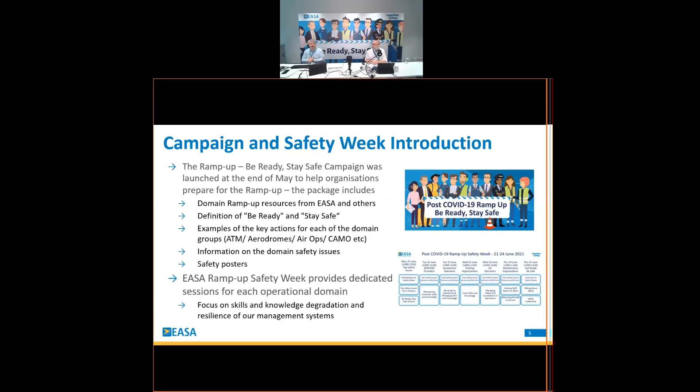Good morning, everybody. I must say that I'm honored to be the moderator for the maintenance session of the post-COVID-19 ramp-up safety week. Be ready and stay safe, this is the motto of this week. I promise a very, very interesting session that will make even our colleagues from the other sessions a little bit jealous.

So in the context of the post-COVID-19 ramp-up, EASA published an updated review of safety issues, version 2, to support the industry in the preparations for an increase in flying activity over the coming months. Organizations should then evaluate those safety issues and, where applicable, capture them in their respective management systems. The document is accessible under the link that is visible in the slide.

Particularly relevant for our maintenance activities, I would like to refer, for example, the effect of biocides on aircraft systems and structural components, skills and knowledge degradation due to the lack of recent practice, which have already been mentioned as one transversal issue. Risk assessment based on previous normal operations no longer valid, and the scale of aircraft storage and subsequent de-storage may lead to technical failures when the aircraft are returned to service.

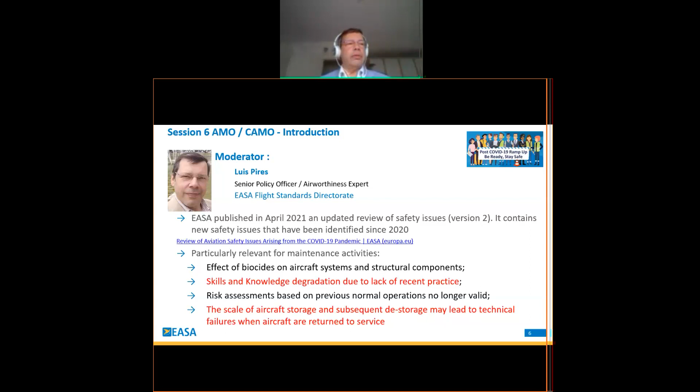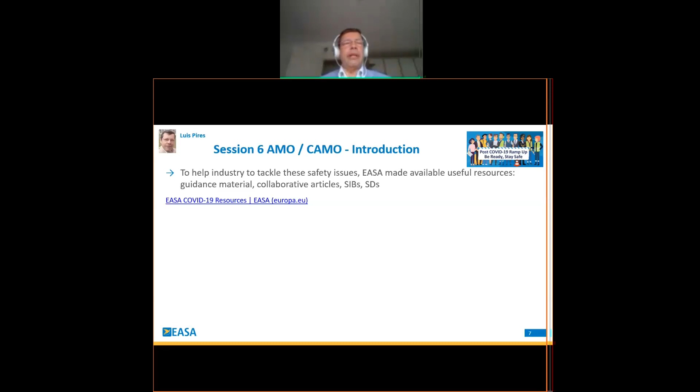So, to help industry tackle these safety issues, EASA made available a set of useful resources, from guidance material to collaborative articles, to SIBs, safety information bulletins, to safety directives. And you can find all those resources under the link that is posted in the slide.

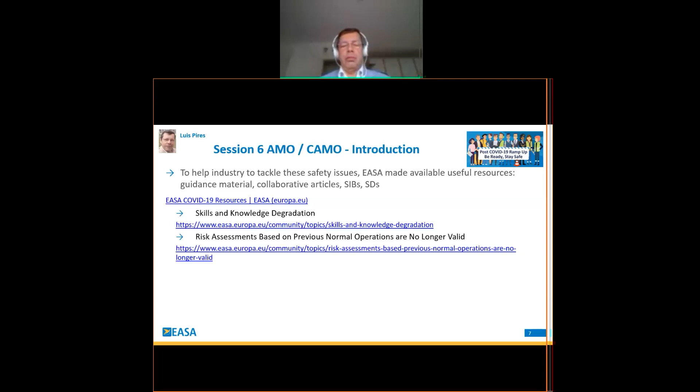You have specific collaborative articles about skills and knowledge degradation and about risk assessments based on previous normal operations that are no longer valid. You have guidelines about the storage of aircraft and return to service of aircraft after storage, which is a really nice one, it gives a lot of information. And I'd like to draw attention also to the SIB 2020-14 with regards to covering the pitot static issues after storage of aircraft due to the COVID-19 pandemic.

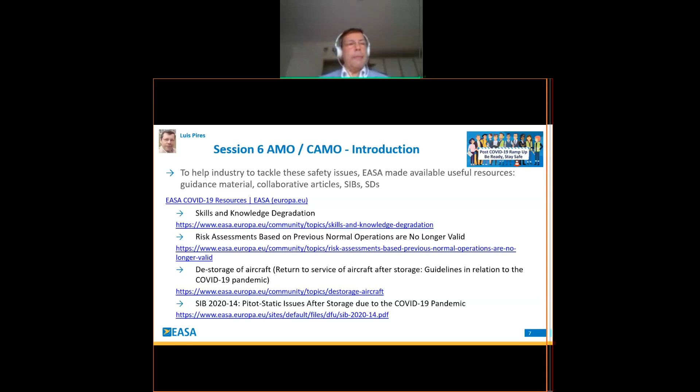So this session will specifically focus, as already mentioned, on those two items: skills and knowledge degradation in the operational workforce, and bringing aircraft back from storage during the ramp up.

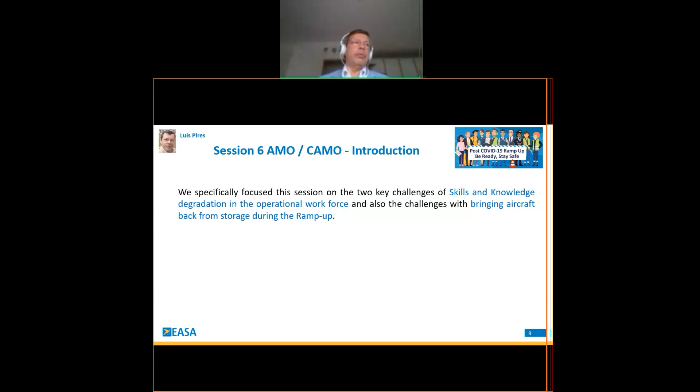We will consider some practical challenges that aircraft maintenance organizations and continuing airworthiness management organizations are facing at this stage of the crisis, particularly with regards to those two items, and what this means in terms of specific practical problems. What specific experience does each operator have? How have they talked about this challenge with their staff, and what action solutions have been implemented?

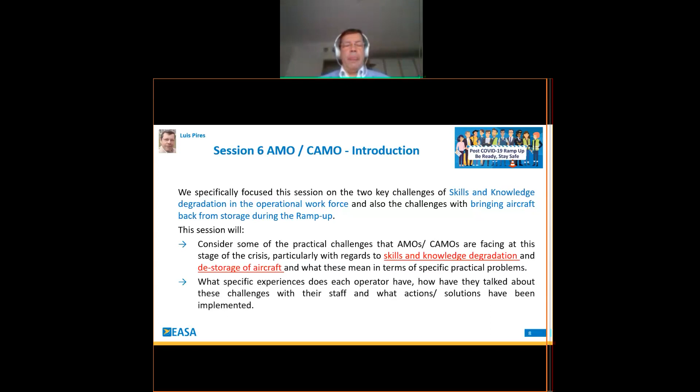Without further delay, it's my pleasure to introduce the panel members for this session. A very interesting composition. I start with David Wind from German Airways, Director of Technical Operations. We have Svein Albertusson from Icelandair, Manager Technical Support. We have Melly Demir from Airbus, Parking and Storage Multifunctional Team Leader. And last but not least, Raj Jagbunda from KLM, Director of Line Maintenance International. So I hope you enjoy this session.

So back to you, John, for the presentation from David. I will stop sharing my screen now.

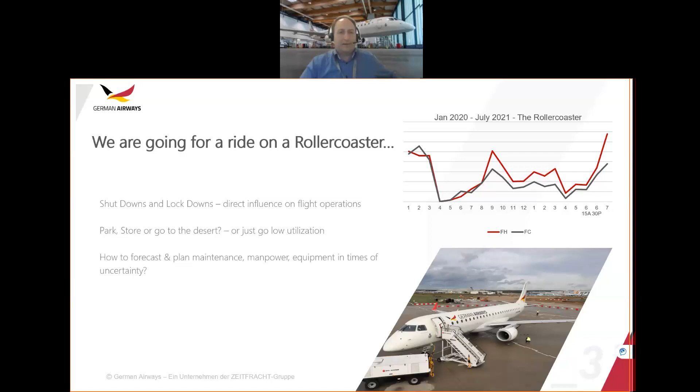Okay, a little bit about the challenges that we faced. Again, being a CAMO and a maintenance organization, there were two different sides.

The first thing that started opening up only months into it was the widening gaps in maintenance. The clock keeps ticking, the flight hours and flight cycles are not being accrued the way they were normally planned for, and this meant we had to do scenario planning.

CAMO was very busy at first, coming up with planning the events. The production planning in the AMO was equally as challenging. For every scenario we had to come up with a realization plan, and it wasn't just one, two, or three, and it hasn't stopped. It continues today because it looks like we're coming out of COVID, but

we have no idea what Delta is going to do to us. So we're still considering and still looking at the scenario plans.

For us, it was also a very important part of this to keep the team. We're a smaller organization, I have 27 people in my AMO and CAMO together. We're more of a family in some ways, and the focus is we have to keep the team healthy. We have to keep them proficient, employed, and ready for the restart.

And that gave us, when we looked into it and started reflecting back, we actually had management of change, which is well established in our safety management operations and department in the organization. The management of change, we also realized, has an awful lot of human factor related items, which also

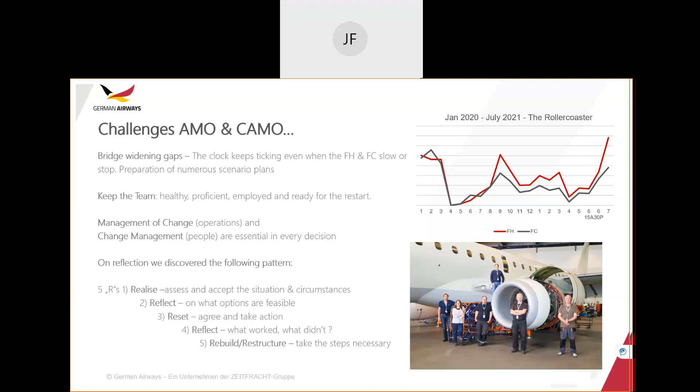And then we came to a reset, because we knew we had to start adjusting and changing things. The key word on this one is agree and take action. Agree in the sense that there might be agreements we need to make on a commercial front, there might be agreements we need to make with the unions, there might be agreements we need to take with the competent authorities. All of these things have to be understood, agreed, and then enacted.

And then we very quickly go into a point of reflection, because some things worked, some things didn't work as we intended. The market was very dynamic and changing, and that puts us back into a correction opportunity.

And then looking to rebuild and restructure, because coming out of this we realize we're going to be a different operation. Our market will likely be different. And not just rebuilding—it may be restructuring actions required in our overall group to be ready to not just restart, but restart into the new world.

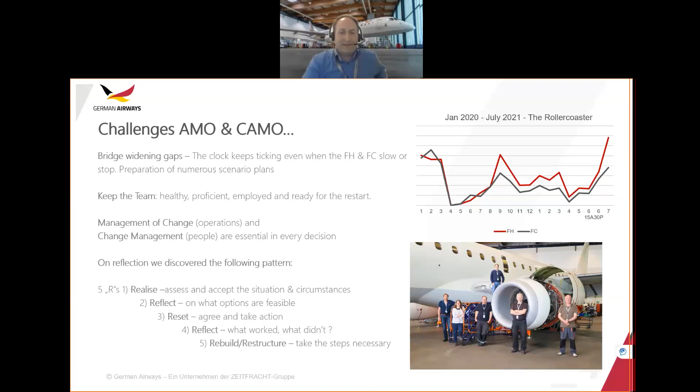Okay, next slide. So, actions taken.

We had a unique COVID risk. I think all of us in the operating environment had a unique COVID risk because working from home is sometimes limited, particularly in the AMO. Some of the CAMO staff can work from home, but it's pretty tough to keep an aircraft operating and having your engineers at home. So there is an awful lot of increased manpower planning to minimize the exposure to risk

that is continuing to go on today, even down to the manner and amount that we test internally to try to prevent any breakouts or events inside our organization, which could have an impact on our manpower and resources to fulfill our operations.

Again, at the same time, we had to look at scalability, because that roller coaster wave meant we had to scale up and scale down in certain areas, whether that be spares, components, human resources, but also be ready for a quick restart.

Again, that then starts introducing other challenges when you are putting staff on furlough. How long are they on furlough?

How do we deal with skill loss and shift? A number of things we started doing was staff rotation between our line and base activities. I put an increased focus on task training, essentially using our existing CAT-A staff task training program and reintroducing it as a form of recurrent training. Mentorship and the buddy system, however, were the most effective, where we were teaming up individuals to ensure that competency was in place.

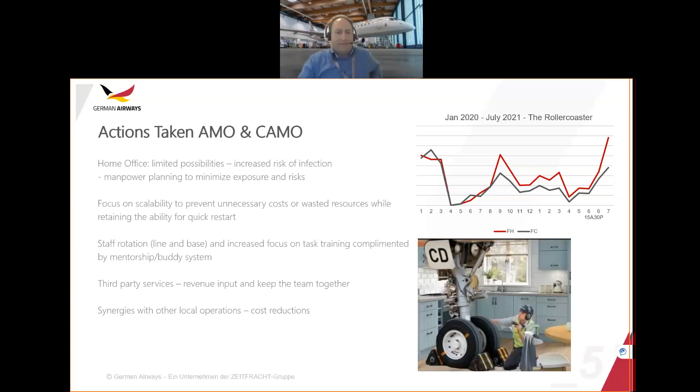So now coming back out and ramping up, there's a number of things that have been challenges for us. Standard consumables - we noted this as early as half a year ago, that things that used to be off-the-shelf products from a variety of vetted vendors may have long lead times. We were quite surprised the first time a standard grease was available in 18 weeks.

So these become challenges to ensure we have all the required and OEM specified consumables in place. Previous supply data - again, because some manufacturers had ramped down production of things, where you had always gotten things inside of a week may not be the case anymore. Brexit hit us right at the beginning of the year as well. Previously we had a very reliable, dependable UK group of suppliers, and suddenly the import costs, the transportation times, the overheads made it a challenge to continue to use them.

And now, towards the ramp up and as we're adding line operations, the staged call-up and recalibration of tools and equipment - these have been processed. We tackled these early, but it's something that often gets overlooked on the ramp up, that things we didn't require would be put into quarantine. But now as we ramp up, we have to make sure we get them all calibrated and back ready for service, and there may not be the capacity on the market to handle things as fast as you'd like.

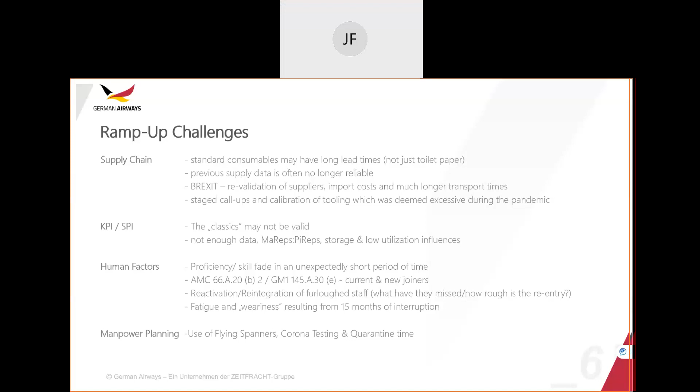Reactivation and reintegration of furloughed staff. There's two scenarios there. It's one thing, what have they missed? But also, quite often the furloughed staff that are being called back in may not be generally the B1s and B2s were kept working in the AMO, but the Cat A's were furloughed. That gives us more flexibility in the operation, but now those that have a lower wage rate are the ones

that have had to stay home, had the furlough impacts, and the reintegration into the workplace. The A's and B's have done all the work and have had to work double duty, and the Cat A's come back in, and there can be a little bit of a rough entry there because we have to deal with some human factors there as well. Perceptions of what is fair and what is not fair can play a part of this. And then tagging it into the other, I think everybody understands the fatigue and weariness that have resulted from going through the pandemic.

Manpower planning, something we had to add also into, and we're reflecting it as well as today. Something we did not at the onset realize was going to be as big was the use of flying spanners, because technical support at certain outstations wasn't available. Corona testing requirements for our staff, and the quarantine time returning from travel or flying spanner work. Actually, for us, it hit 12% I was losing in quarantine time at one point in time due to my flying spanners of resource. So that needs to go back into the resource manpower planning.

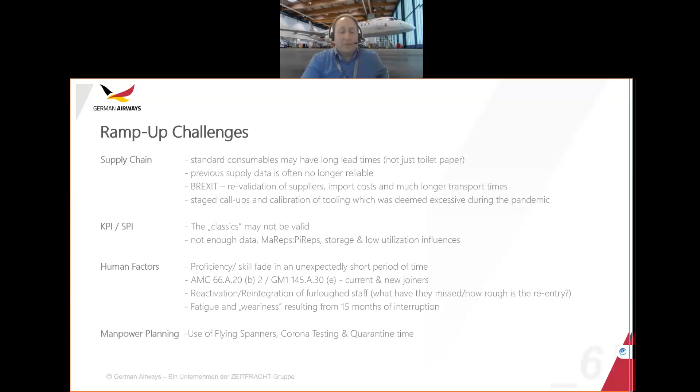Okay, tools available, management of change and change management. All of these different little things that we've seen in our small operation. We looked at what criteria can we use, what tools can we use to help us ask the right questions, to challenge our decisions, to establish barriers and mitigations. And we came back up that we were always using certain portions of the dirty dozen. Very classic, but applying the questions that we see in the dirty dozen and the warnings has helped us make our decisions and really challenge our thought process when we're analyzing what could happen as we make adjustments in our organization.

Following on to that, I guess if there was a mission statement now as a closing statement to my presentation, it's a shame to take a problem and not turn it into an opportunity. And I think what we see coming out of COVID is it's an opportunity to introduce and improve processes, training, efficiencies, and safety promotion inside the AMO and inside of our maintenance organization and our CAMO. It'd be a shame if we come out of this and we haven't had the opportunity to improve.

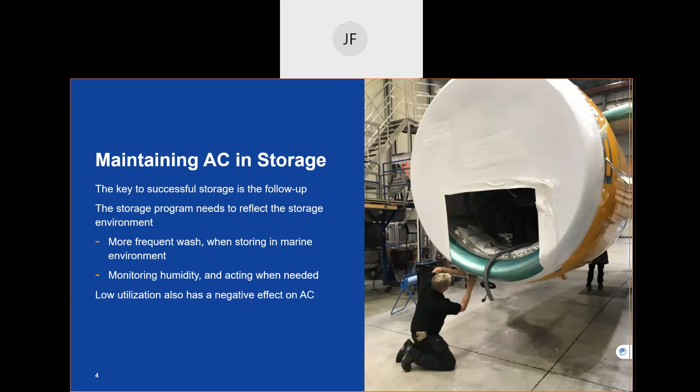We also had a few aircraft in low utilization. Every now and then we saw a degradation in the condition, and we tried to act as much as possible. But we always experienced the roller coaster ride, like David mentioned, so we are familiar with those challenges. Next slide.

So when we obviously realized that COVID wasn't going anywhere anytime soon, and the summer was about to end, we decided to relocate the aircraft that had been stored in Keflavik. We realized that the environmental conditions had a great effect on the condition of the aircraft. So we started to look southbound and relocate the aircraft to Roswell and Lleida in Spain. That actually gave us some experience in ramping up or returning the aircraft to serviceable and airworthy condition.

Of course, we were not familiar with all of the consumable materials and so on required, as mentioned in the maintenance manual for storage. So that gave us good experience in getting the aircraft ready. But we also realized that storing the aircraft abroad in different locations meant more complex oversight and more planning. So that was a challenge we needed to tackle. We also had aircraft here in Keflavik in both active and long-term storage, so those are definitely challenges. Next slide.

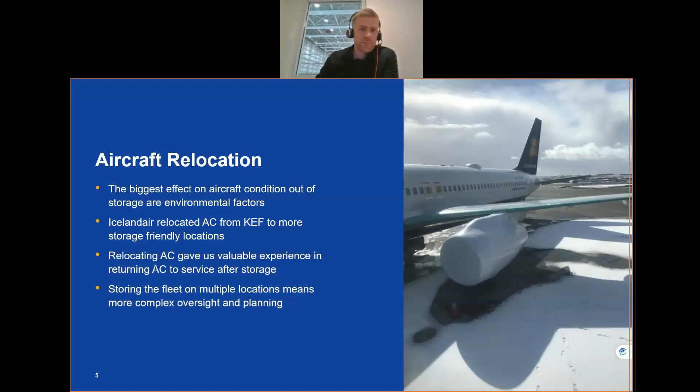Talking about the Icelandic team, the employees, this was definitely a difficult year, probably one of the most difficult years we had. Of course, we experienced layoffs and financial difficulties and COVID restrictions like everyone, and it definitely had a great impact on the mental status of the team.

We saw clear signs of fatigue and strain in the employee team, and basically I would say some people have been flying on reserve fuel for the last month. So that's definitely a concern going into the ramp up that we really had to discuss.

But we also realized that having a plan and sharing as much information as available is very helpful for the employees. And if you don't know what's coming up, you have to tell people that you don't actually know that. I believe that helps.

It was a concern that there was degradation in training, but we always were operating the aircraft, always operating the 757 and 767. Of course, we need to retrain people for the 737 MAX after the prolonged grounding we experienced, but that's been a factor as well. So, next slide.

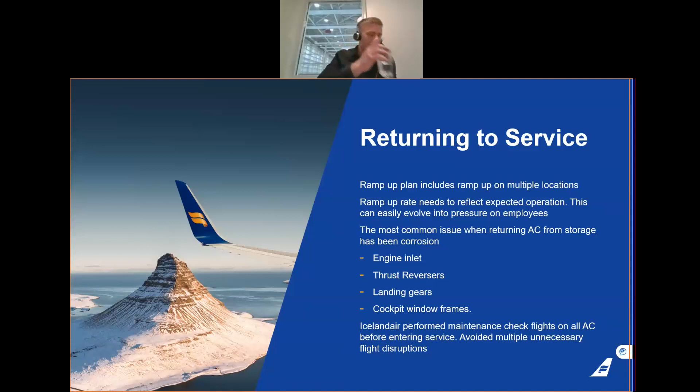Talking about return to service, we had, as mentioned before, a ramp-up plan that included ramp-ups at multiple locations. That was not necessarily bad. We had multiple teams working on the aircraft, which made it so we could ramp up faster with multiple locations and multiple teams.

But that demanded a good plan, we needed to have good conversations with all the employees and third-party MROs. And a speedy ramp-up can definitely turn into pressure on the employees, pressure on both maintenance and CAMO personnel. So that's definitely a risk factor.

Talking about physical conditions and findings out of storage, probably the most common factor is corrosion. We had to mention: engine inlet corrosion, thrust reverser, landing gears, cockpit window frames, to mention some of the issues we've been tackling. Of course we had some electrical issues and hydraulic fuel leaks and so on, like everybody, but corrosion was probably the biggest factor.

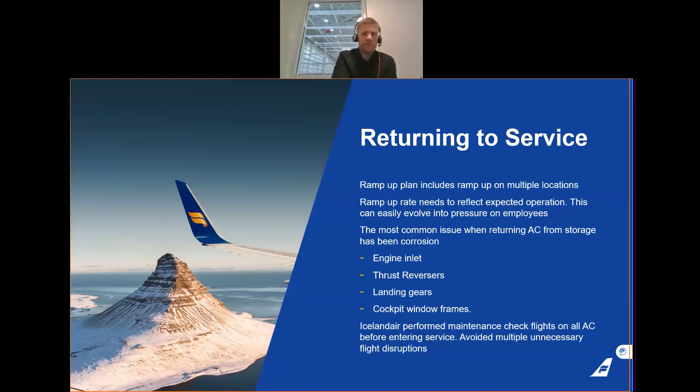So we have been looking into in-service issues since we've actually got a pretty good size of our fleet flying. And then you cannot... John, I can hear you. Oh, sorry. That's all right. Technical. Yeah, it's all right.

We have been seeing that increased usage raises the reliability rate and technical dispatch reliability rate. We have not detected any obvious failure trend that is common to the fleet. It basically depends on the individual aircraft, but common in-service failures after storage are minor electrical issues, bulb indication issues, minor leaks and streaks, and something like that. So definitely we cannot say that we have a trend that we are concerned of. So far, so good, I would say.

I believe that's all. Yeah, thank you very much, guys.

Okay, thank you, Svein. It was a very interesting overview of Iceland's main challenges with regards to storage of aircraft due to the COVID-19 pandemic situation. What attracted my attention in this presentation was the need to put multiple aircraft into storage at different locations, which means more complex oversight and planning. You also mentioned that follow-up is the key to successful storage. So could you please explain in a few words how did you ensure the follow-up of your fleet stored in different places, and what challenges you were or are facing during the storage of your fleet?

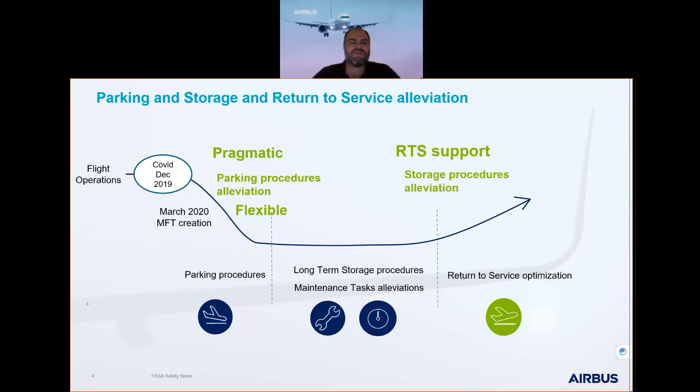Then we saw, okay, we need to focus on different topics. So in between, we now focus on storage procedure optimization, as the pandemic is taking longer than expected, and we still have a lot of aircraft on ground - thousands of aircraft still not flying and will not fly within 2022. Also introduced within this multifunctional team is a focus on finding a smooth return to service for all the customers who had deviated in between because of these resource issues up to now.

So we also support this kind of non-revenue flight, what Sven mentioned, the maintenance check flight. We have a recommendation for all Airbus aircraft after a parking or storage period to perform this, and here we support these activities as well.

Additionally, as mentioned by the two other guys before, with support for all the additional parts, spare parts, and consumables, we had been in touch with all our suppliers to find solutions quickly so there is no break in the supply chain. So if we go to the next slide, please.

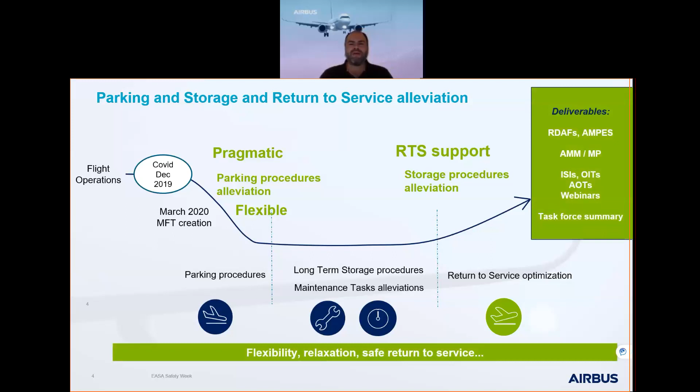During the smooth return to service, we try to anticipate and monitor the situation overall. So what we did is track the questions we receive within Airbus, and also monitor what's going to happen. It was not only questions from the airlines, but also our field services who are closely in touch with the airlines. Together we identify the issues, and our SMS, our safety management system, is connected every week with our MFT to analyze the output, if there's a need to take action.

We have recently introduced a return to service checklist, which will be published in the Airbus AMM, to support the customer to cross-check before entering service that all required steps from the AMM have been performed. We consider this a support function out of the SMS.

Just to give some examples, during the parking and storage event we had some findings. Typical findings are birds and insects in the aircraft in different holes. Recently we've seen snakes as well around the tires, because it's cool over there in the desert, so they choose that location. However, we have also seen corrosion in dedicated areas. Here we start to mitigate in between by publishing articles or ISIs, in-service information letters, to share where to add some temporary components to secure these areas.

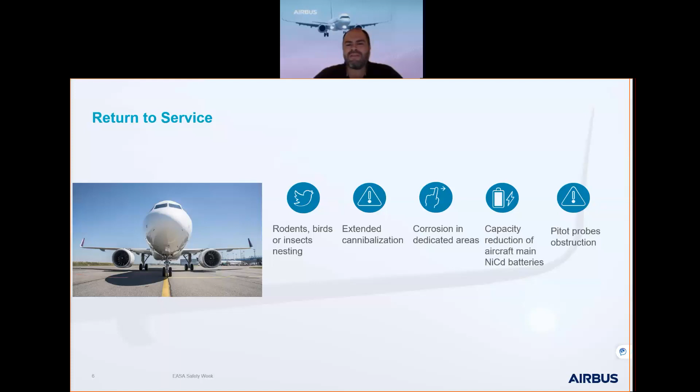As mentioned, we have regional calls from different parts of the world on a weekly basis. We get information from the APAC region, China, Middle East, Africa, Americas, Europe, all connected to the multifunctional team. We have more than 20 teams connected to find solutions and analyze ongoing issues. We've shared more than 1,700 solutions in between. We've had a lot of webinars and also updated the aircraft maintenance manual, based on the experience gained during the pandemic situation.

For your information, we summarize all the output in a monthly parking, storage, and return to service summary letter, which is shared with all Airbus operators. Normally you should have access through Airbus World or through your field service team. You can request it and receive a copy. It's a well-done summary with all the proposals on how to mitigate and avoid issues at return to service.

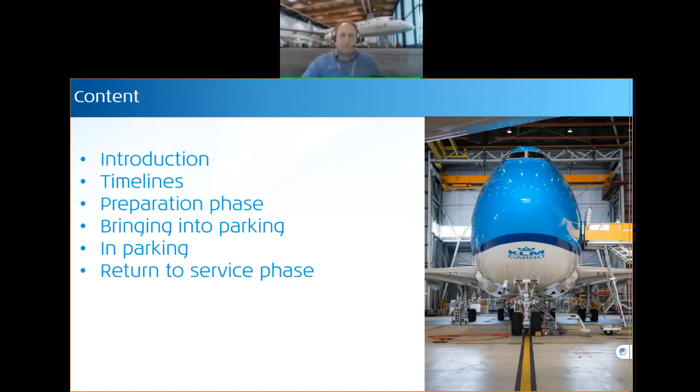A short introduction of the content. I'm going to tell you something about the parking program, the timelines, the preparation phase, bringing the aircraft into parking, and then the aircraft is really in parking, and then the return to service phase.

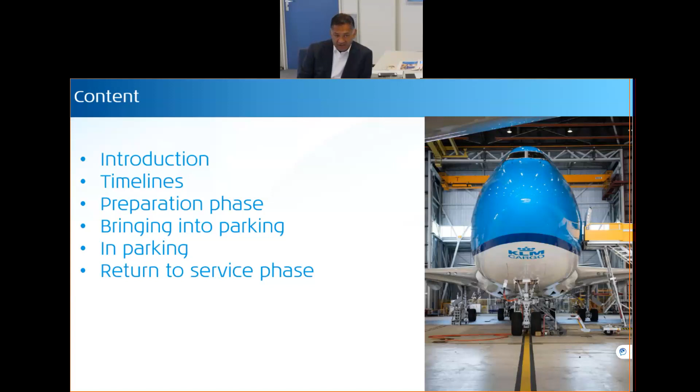A short introduction of myself: 30 years in aviation background, in engineering and maintenance, done everything except engines. Current position, director of line maintenance. My previous role was as program director in charge of the parking and storage program within KLM. Next slide, please.

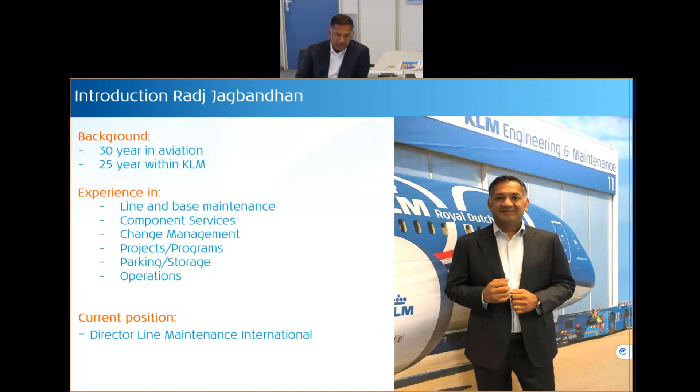Before we go to the parking program timeline, a short introduction. We generally had 80% of our fleet on the ground at the home base, Amsterdam airport. The grounding and parking of the fleet affects engineering and maintenance as an organization in a couple of areas. First, the aircraft maintenance program was changed from flight hours into calendar days, affecting a lot of things. Second, the scheduled maintenance checks for line and base maintenance, especially A checks and C checks, we decided to continue based on calendar days.

What we also saw was the shop visits for engines and components went down because there was no accumulation of hours and cycles. Our organization, due to change of workload and work scope, was also changed a little bit. What we did is keep the organization as is, so we didn't change anything in the structure.

What we saw was, especially in line maintenance on the European fleet, the narrow body, flights were nearly brought to zero. As I mentioned, 80% of the fleet was on the ground, 20% was flying, and that was the 787 and 777 fleet, flying the international network with cargo and without any passengers.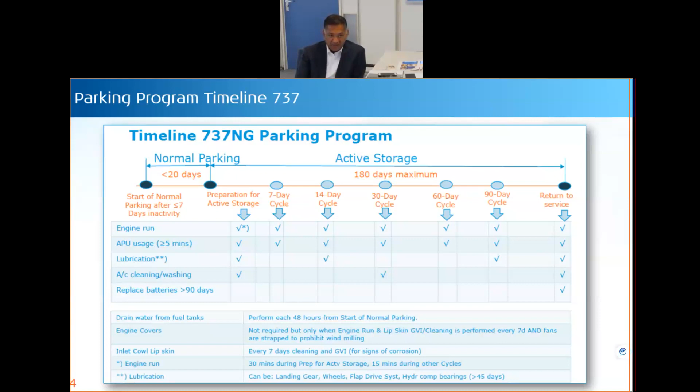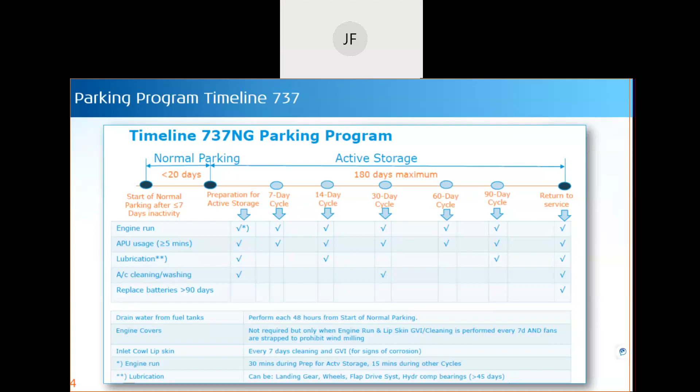So what you see here again is the timeline. After normal parking, we will be doing, every 7 days, the engine run, APU usage, lubrication, aircraft cleaning and washing, replacing batteries after more than 90 days. We keep this going for a maximum of 180 days. Next slide, please.

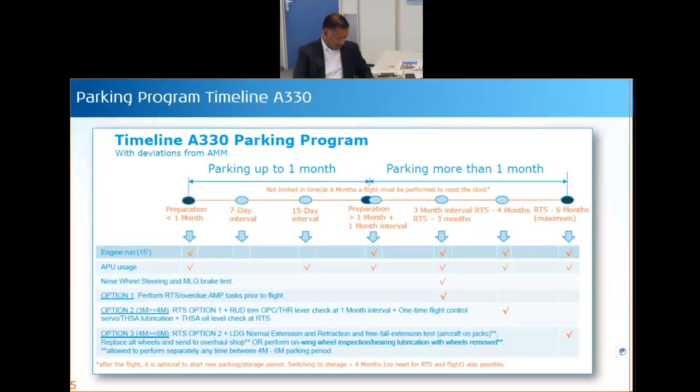And the same with Airbus. The only difference between Airbus and Boeing is that Airbus talks about parking up to 1 month and parking more than 1 month. Again, preparation for less than 1 month, then after 7-day intervals you have to do a couple of things, then 15 days, and then preparation for more than one month interval.

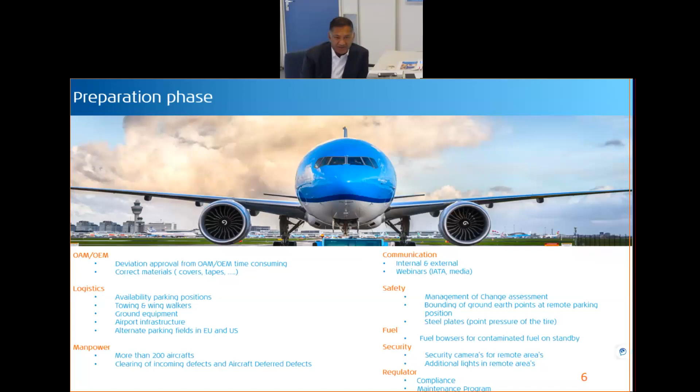This was all from the compliance side and also the maintenance program side, done in the preparation phase. In the preparation phase, we kept the aircraft in a parking position for a maximum of 20 days.

Bringing into parking, the first thing was the maintenance program. We had an internal discussion about stopping the clock, meaning stop everything being done on the aircraft based on the maintenance program. Since we decided to keep the aircraft in a fly-away condition, we decided to execute the maintenance program every 7 days, as mentioned in my previous sheets on the timelines.

Manpower and the number of staff related to COVID-19 restrictions and execution of maintenance was also something we had to work through. We worked with small teams of 3 people, especially on the 737 fleet, since you cannot work with more than 3 people on one aircraft in order to keep to the COVID rules.

These dedicated teams took ownership. In the first weeks of bringing aircraft into parking, they had to figure out things like alternate materials, putting the aircraft in a proper position on steel plates, the equipment, and preventing damage due to weather or wind.

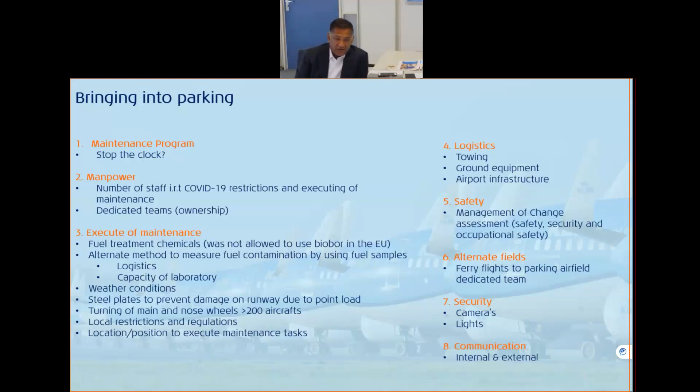So we had to also do some additional security requirements, meaning installing additional cameras, lights, and everything needed to make sure you can do normal maintenance, but also return to service, that you can do all the activities. Simple things like de-icing, because we were rotating aircraft from the parking field at Groningen to Amsterdam. So every 20 days, we did a ferry flight of the 737 back to Amsterdam, and that aircraft went back into our network. So we were rotating our fleet, and of course communication internally and externally.

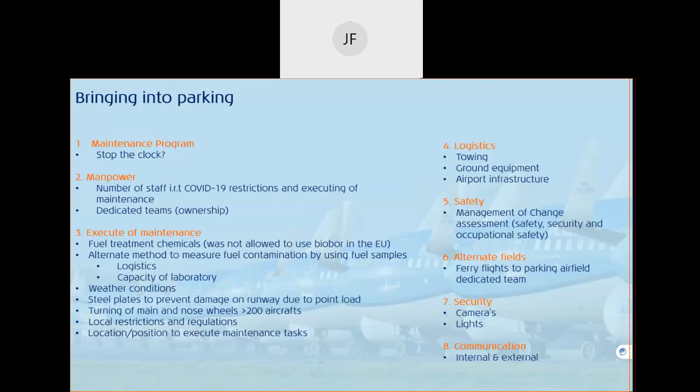We did also the management of change, meaning you have to do the risk assessment, safety, security, and occupational safety to be in compliance. We had also the Dutch CAA who did an audit for a whole day to check how we're working, what we're doing, and how everything is in place. And of course, communication, a lot of media attention, and the execution of maintenance, idle runs, service checks, in combination with the weather condition, because we had the biggest hangar in the world, the open sky, and yes, that gives also some challenges.

And we had to also look for damages and the building of birds' nests in the aircraft. One thing we were not doing is cover the engine inlets and the exhaust, because we were doing an engine run every 7 days, and the dedicated team were inspecting the aircraft every day for damages and checking if there were animals, birds, or insects in the wheel well or in the engine intakes. And the pitot and static ports, of course, were covered, and the APU exhaust was also covered.